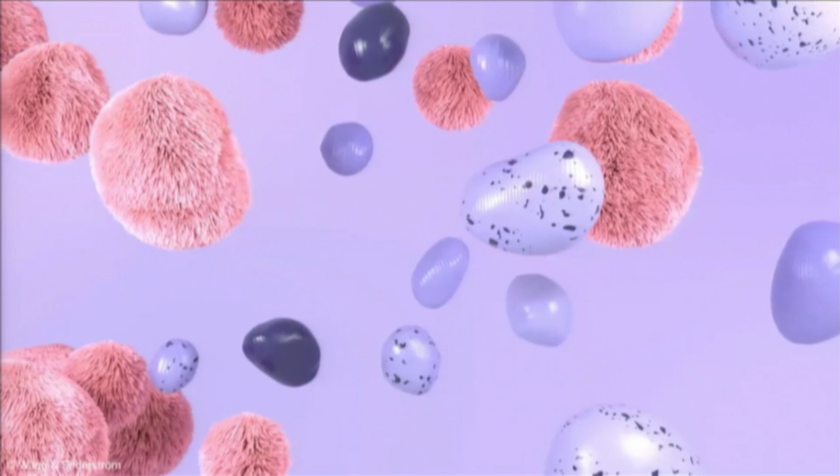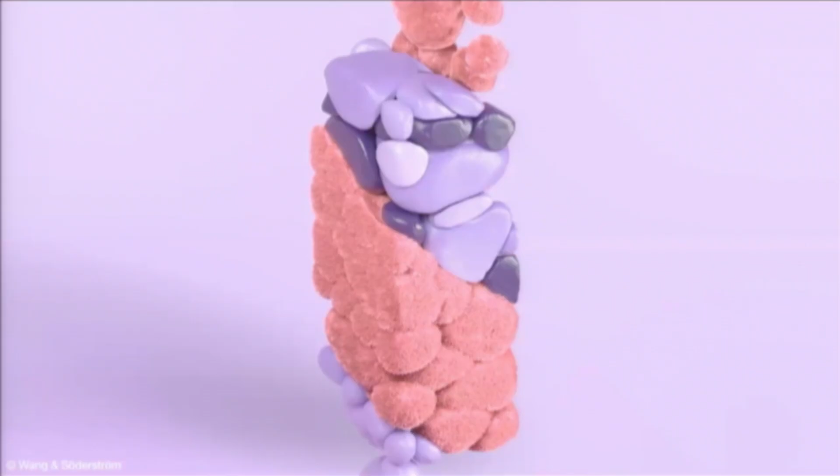I wanted to start by saying, we are never without materials. These seemingly mundane fragments and blobs of metal, plastic, ceramic, and glass are the stuff from which our whole civilization is constructed. Yet, perplexingly, while they do so much for us, we rarely pause to marvel at them. In fact, most of the time, we ignore materials. Their ubiquity is precisely the reason it's so easy to forget just how foundational a role they play in our experience of the world, of how we relate to and express love for one another, of the way we sculpt our bodies and identities, of how we fabricate the present and the future of everyday life.

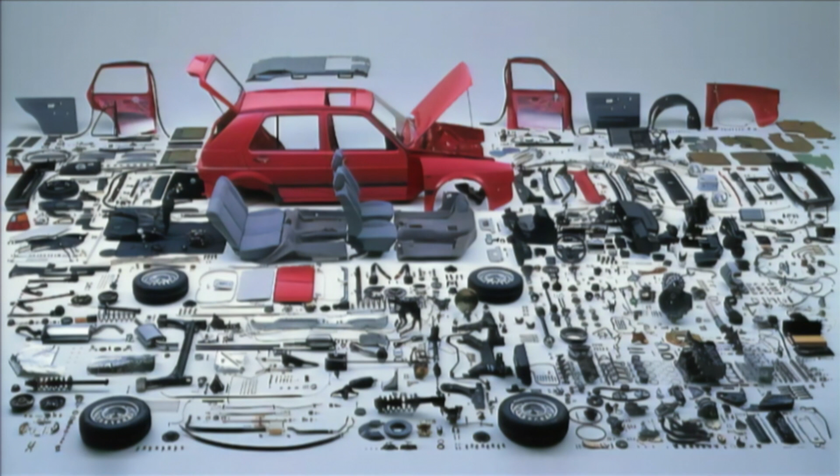Throughout history, societies have discovered and developed materials, made tools and artifacts from them, and in so doing, constructed themselves in the process. In many ways, we're living out the material dreams and needs of our ancestors, with much of our lifestyle that we're accustomed to today standing as a product of past inventions.

In order to do this, we need to readdress our relationship with materials. So this raises the question, what will the next 50 years look like? What will we dream up? And most importantly, who gets to take part in this process?

And this quote really puts it perfectly for me. We are often told we are materialistic. It seems to me that we are not materialistic enough. We have a disrespect for materials. We use it quickly and carelessly. If we're genuinely materialistic people, we would understand where materials come from and where they end up. And this is a quote by a Guardian journalist called George Monbiot.

And I wholeheartedly agree with him. We still have so much to learn from the planet. Exploring, experimenting, and working with the Earth's materials has led to so many groundbreaking discoveries, from the everyday to the unexpected and awe-inspiring. To date, human civilization has never existed without materials. They are the glue of our very existence, as ultimately everything is made from something.

But we've abused our time on Earth, stretching its resources to the ultimate brink in a bid to feed our all-consuming culture, an ever-growing need to own and to experience. All forms of life are equally precious, and so are their needs. The universe, contrary to common belief, was not created for humans alone. But human behavior actually tells a different story.

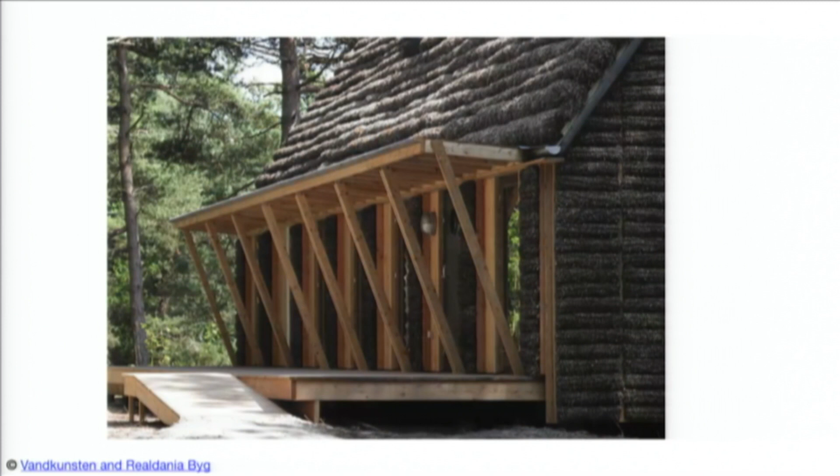And it can also be made into something perhaps more insulatory and protective. This is something that a lot of traditional Danish houses have actually been applying onto the roofs, as a form of thatching. And it's really insulatory, very protective, and this is a more modern interpretation of it. It could also be considered as IKEA's future meatball, something that Space 10 explored through a research project they did a couple of years ago.

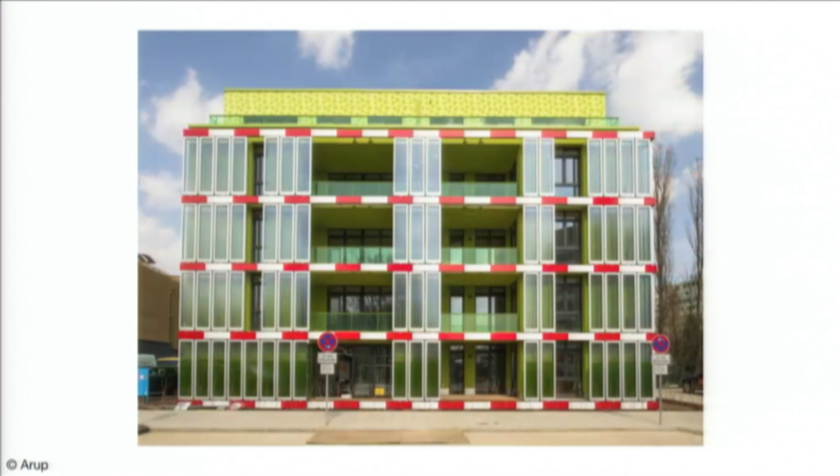It can also be something that could potentially be used as a fuel. So this is, I guess, an experiment that architectural engineers Arup have created by powering an entire building for 2 weeks using purely just algae. It can also be applied as a printing ink for fashion and clothing, as well as for paper. And it could potentially be something that could power your home as a technological device.

So this shows you the expanse of how a single material can have so much versatility if used to its full potential, much like a chef. And if we basically think about changing the narrative, which then informs behavior change, which then ultimately changes the system. And materials can help to expose the cracks of our ailing systems. They have the power to solidify new norms because they can make more preferable futures tangible.

And collectively, designers, artists, makers, scientists, engineers, architects, etc., are working to address these challenges by each placing a material in the foreground of their response. Most crucially, we're encouraged to recognize that the meaning of matter is fluid. Just as our quest to find and solve new problems is ever changing, so too are the values and roles we ascribe to materials.

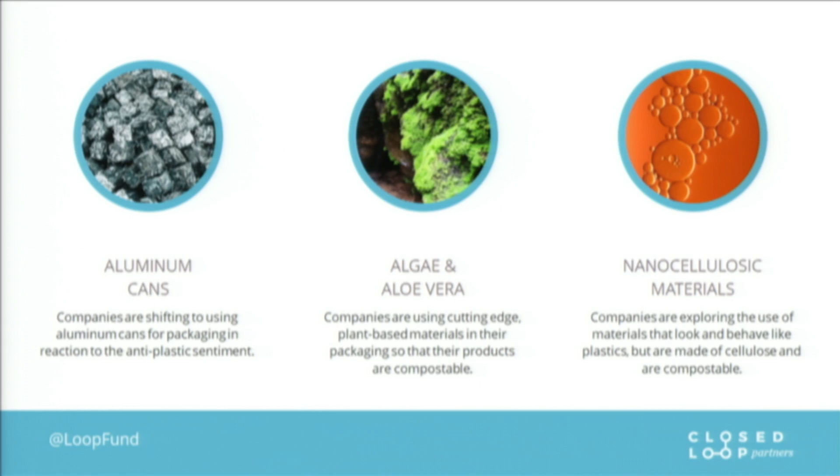And so some companies are looking at aluminum cans. Aluminum cans are infinitely recyclable, so that's a huge advantage. There always typically is some portion of that can that will use raw virgin aluminum, which is a challenging industry. We're seeing a lot of applications of algae and aloe vera in the startups that we're reviewing. And we're also hearing a lot more about nanocellulosic materials that can mimic the properties of plastic, but then don't have the unwanted side effects or consequences of the method of degradation after the end of use.

So innovative materials are part of the puzzle, but in the absence of collection and recycling, all of these materials will still have a linear life cycle. And so that's where we are continually working with the companies in our portfolio and the entrepreneurs we see to have them look downstream as well as upstream. But our current recycling system is not meeting all of our needs in terms of the volume of materials, the level of contamination, and how it's actually getting through our waste systems. And so that's where we're also looking for innovative new solutions, new technologies that can handle mixed plastic waste.

So only 9% of the world's plastic is recycled. And at the same time that I think everyone is recognizing, from industry, oil and gas, plastics manufacturers, to everybody in this room, that the way that we use and dispose of plastic is a huge problem. Despite that awareness, global plastics demand and production is forecasted to triple by 2050. So we're looking at doubling down on more of the same at the same time that we're scrambling to replace this in some way.

And so there's a tremendous misalignment between the demand for post-consumer recycled plastic and the supply that our system delivers. And so we're looking at technologies that can tap the plastics that we already have of all types, hard to recycle mixed plastics, and channel them to meet this continuing demand rather than continuing our current system of extraction of raw resources that end up in our oceans.

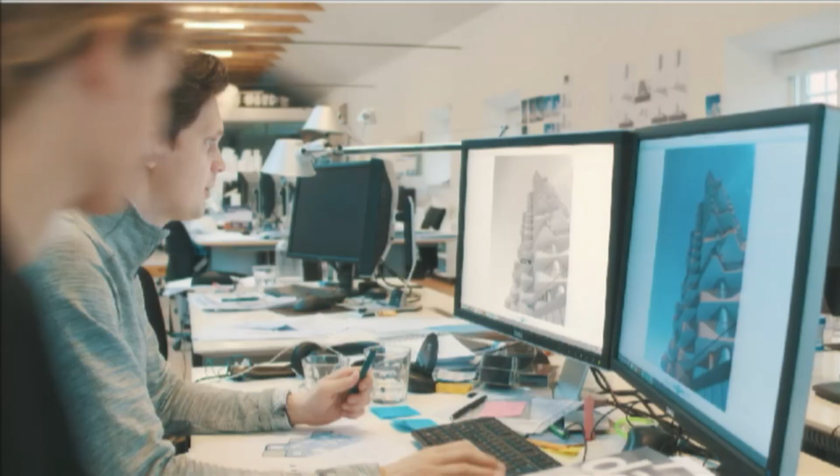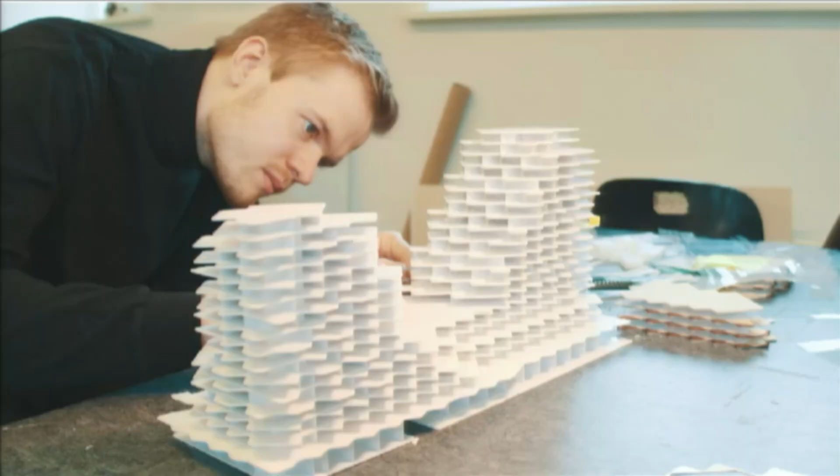Just a little bit about who we are. This is our office. It's an old cannon boat shed in Copenhagen. What maybe differentiates us a little bit from other architectural practices is that we have quite a big focus on research as a core part of our business. This is a movie from our office, and the reason why I'm showing this is that it shows some of the values that we have in our office, which is really openness, a non-hierarchical way of sitting together. I believe the idea is always king. It doesn't matter if it's the partner or the intern who comes with the idea. The idea is what drives us.

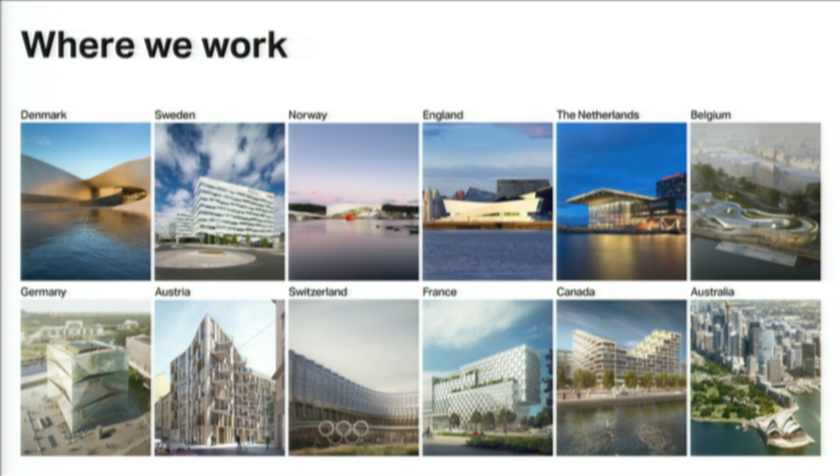So we work more or less all around, mainly in Northern Europe, some projects in Canada, quite a few projects in Australia as well. We don't do one particular type of building. We're not residential architects or hospital architects, but we do a wide variety of building typologies.

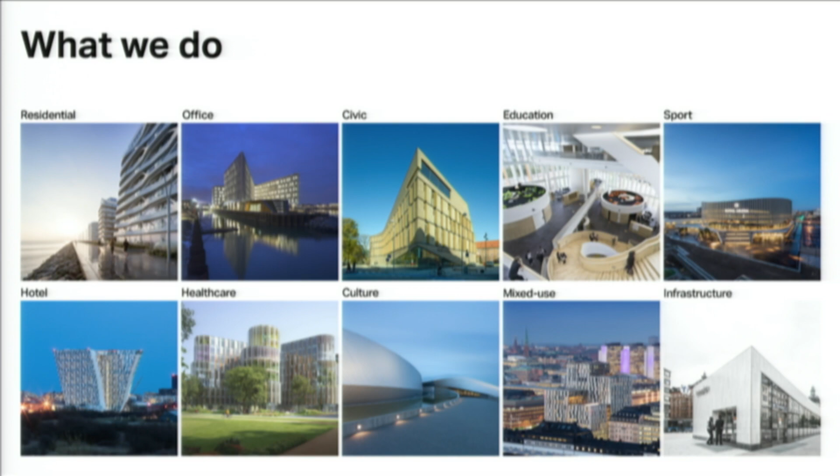And what we like to say is that what binds these projects together is our approach, our methodology, and that is really trying to maintain a closed feedback loop of research and practice. So my role in the company is really to try to nurture some of the research projects that we have in the office and try to bring some of that knowledge into the practice that we have. One of the things we do is we write books. This is a book we did some 7 years ago together with Bill McDonough and Michael Braungart, the founders of Cradle to Cradle.

We were super inspired by the Cradle to Cradle thinking, and we really wanted to understand what that meant for architects and designers. How can we work with this? So we did a book where we tried, almost pedagogically, to say: what are the principles we can work from? How can we do it? What technologies are available? And we made that an open source publication for the building sector in Denmark.

One of the questions posed within Cradle to Cradle and the circular economy is how can we be smarter about waste? So we asked ourselves: how can we create tomorrow's buildings with the waste of today?

This is an image from a research project we did. It's the team scavenging through Danish agricultural waste. This is a factory producing a kind of starch for Coca-Cola Zero, to give it the same viscosity as normal Coca-Cola. They do this kind of fiber processing for a lot of companies, and they have almost mountains of fiber waste. It's a good day at work when you can dress up a bit like a scientist and walk around in waste.

Talking about circularity and financing, this was an interesting project because it was owned by a foundation. Their business model was to attract people in the shoulder seasons to this hotel based on a narrative of sustainable technology, and then reinvest part of the earnings from the hotel into new technology—constantly making a demonstrator of what sustainability could be. We helped them do that project, and this is just some of the solutions we did. We did around 70 green solutions, as we called them at the time, hence the name Green Solution House.

I'll show some of them. This project is now about 8 or 9 years old. At that time, working with transparent PV solar cells was quite new, so we wanted to make an ornament out of producing energy, turning it into an architectural experience. We really wanted to look at what existing materials we could upcycle.

We had to change the windows for this building because we had to live up to new energy standards for the glazing. So together with the manufacturer, we turned those old windows into glass fiber insulation, which we used to insulate the old pool, which was worn down, turning it into an energy storage—using solar heat to store in the old pool and use throughout the building.

This is on an island in Denmark where they do a lot of glass art—they're known for it. So we visited the local glass artist to see what kind of waste material they had. They had this beautiful glass waste, which was then run through a machine so the edges were smoothed, and we used it as pavement in the park.

We looked at the granite production that was also quite specific to this island, where the waste product of that is the kind of granite dust that we used as a settling layer for all the landscaping, instead of what you usually use, kind of oil-based things for that.

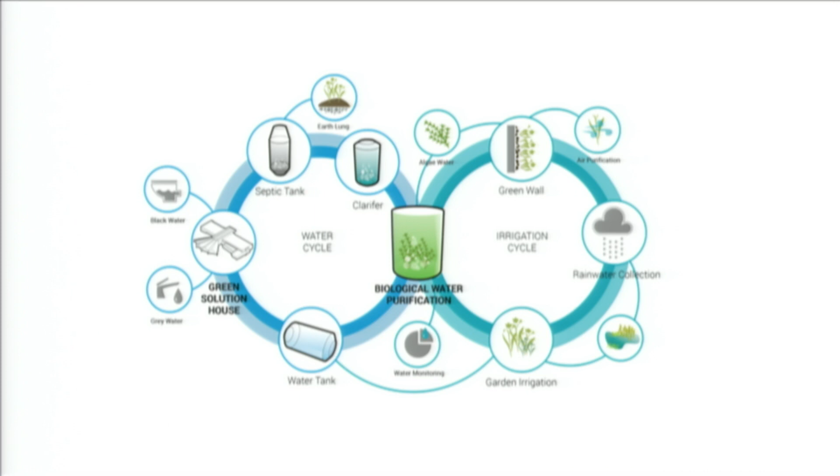We looked at water as a potential resource for the architecture as well, so doing a closed water system where we run the gray and black water of the building through these algae tubes that stand in the facade. Quite a funky architectural feature, I would say. They go up and down and have this green glow to them, and they're cleaning the water that then feeds back into this green wall at the conference part of the hotel.

I think one of the key questions we are asking ourselves in the Danish building sector right now is how do we actually design for future circularity? It's great if we can reuse some of the materials we already have in play, but how do we begin to design something today that doesn't leave the same problems in terms of waste generation in the built environment for the next generations?

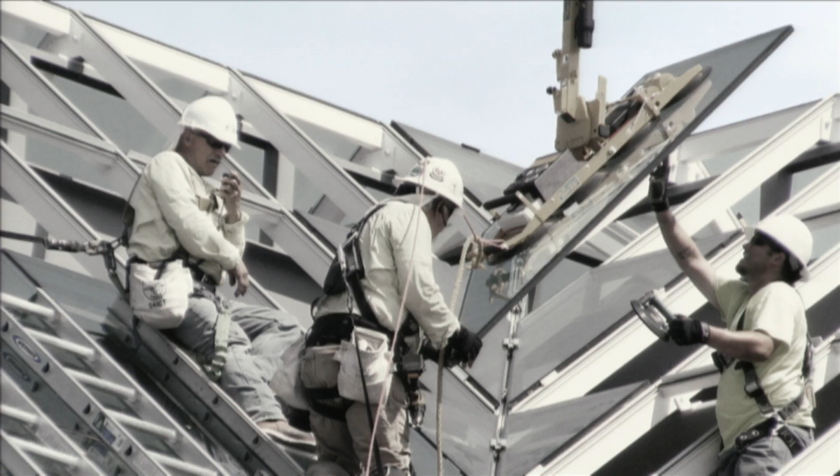89% - that's what we popularly say we recycle from Danish building waste, or building waste in Denmark, and that's true, but it basically looks like this. This is how we build in the industrialized building sector. The building sector in Denmark and Scandinavia is quite highly industrialized. There's even a guy talking on a walkie-talkie, and people know where all the components are going, and we have it all described in a digital model. So we feel we have it pretty much under control.

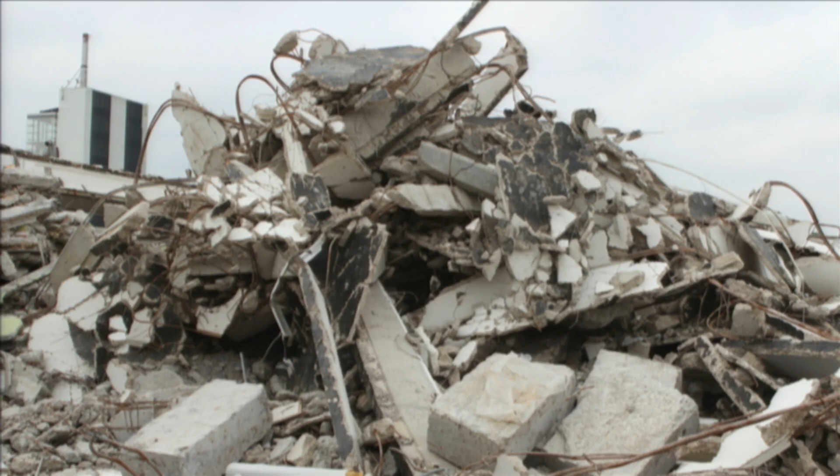And this is basically what we do when we have to take a building apart again. It's a big grab, and then we more or less crush everything into gravel, and then we sell it at a low price. So we might recycle 89% of materials, but that has to do with mass, with weight, not with value. We actually only recycle 2% of the value. So there's a huge value loss in the way we deal with existing buildings and material from existing buildings. We like to say we need to talk about value, not volume.

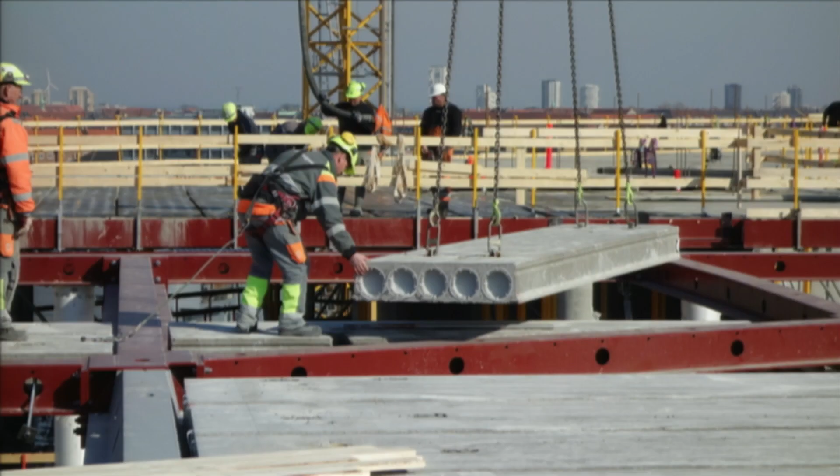And I think that's a key part of the discussion within the circular economy. So we tried to do a book on this, called Building a Circular Future, where we try to outline the principles of how we should begin to design for a future that looks different today. We'd like to show this image, which is a typical image from a construction site in Denmark, and it would be great if this could be a demolition site as well - if this image could be both. That's how we like to perceive it.

This is the diagram we use as one of our methodologies to understand this. This diagram was originally done by Stewart Brand - before he became some kind of tech guru, he was actually thinking about buildings. What it says, which I think is quite profound and simple in a way, is that a building is not a static thing. It consists of a series of lifetimes, a series of metabolisms that need to be treated differently. So if you look at the lighter parts of a building, you have to understand they are likely to have a shorter life than, for example, the foundation.

We're trying to discuss this in a research project that we are now turning into tendering material, going to be tendered out for the Danish industry to react to. It's basically a very simple housing project - public housing, done at a restricted economy. The innovation here, or the claim for circularity in this project, is that we want to build it so that 90% of everything that goes in there can be taken out and reused without any loss of value. It's quite a push, and we're still trying to figure out how we will evaluate and document it. But that was our moonshot to begin with.

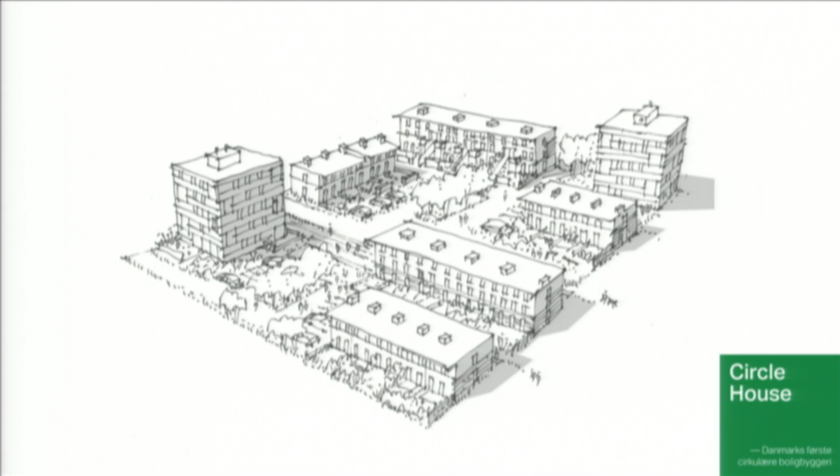What we did is basically all the development needed to be done together with a broad range of players from the industry - everyone from other architects. We didn't want it to be our design.

We wanted to make a system for everyone, from manufacturers to engineers to environmentalists. One thing we looked at was how to make a concrete superstructure, the load-bearing part of a house, so it can be taken apart again. You might ask why we didn't do it in wood - it would have been a lot easier. But the Danish concrete industry is so successful that they haven't done any innovation in 50 years, so we wanted to get them on board and say, hey, you also need to look at this and work with this.

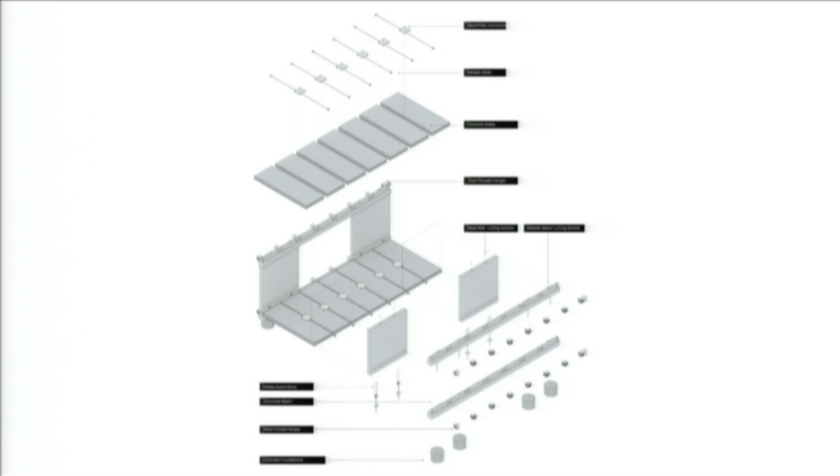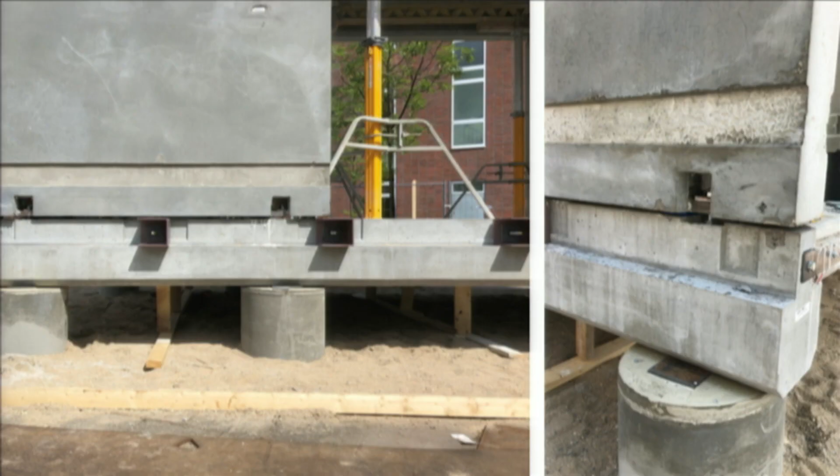This superstructure system is based on mechanical jointing - this is the demonstrator. All the prefabbed elements can be put together, then we cast it out with a chalk-based mortar, and it can be high-pressure hosed free again. So in 50 years, if you have to take this apart and move the elements, it's fairly easy to do.

We're also just showing what's possible, experimenting with different facade materials. This is a post-consumer plastic shingle, just to indicate that you can do that. To the left is a ceramic tile designed so it's hung on the facade without mortar, meaning you can screw it off, and if it gets worn, you can turn it around and use it again. The third one to the right is cork, made of waste fractions from cork production, pressed into a facade material.

I want to leave you with one last project, a big commercial project where we're putting some of these more research-based things into play. It's a project that begs the question: how can we transform the existing building stock? How can we do something that's not just hammering everything down into gravel?

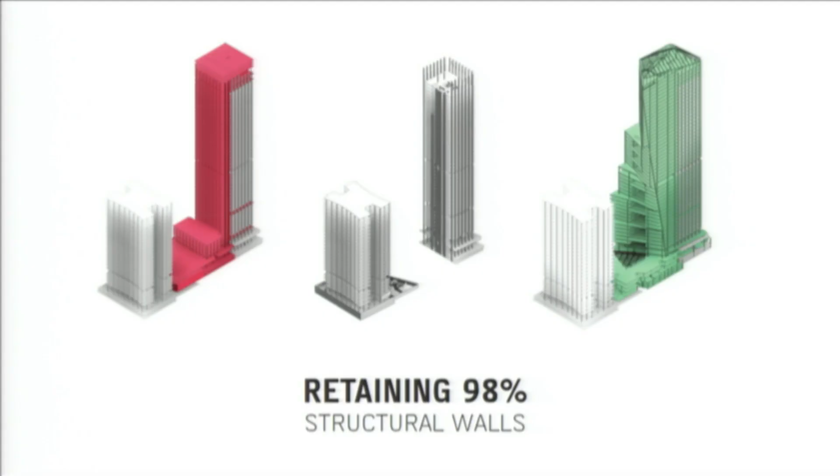What's super interesting is that there's an existing high-rise on the site that we're turning into this. What's marked in red is what we take away, and what's marked in green is what we add. We're actually retaining 98% of the structural walls of this building.

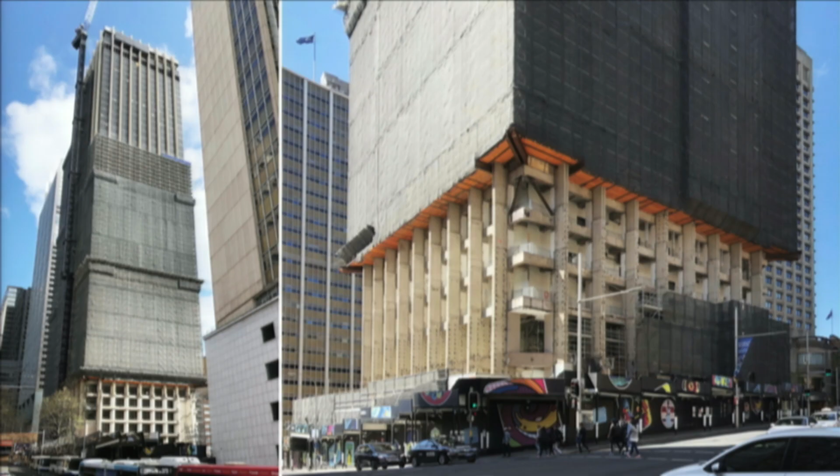This is how it looks on site now - you can see they're stripping everything down and putting in new slabs and a new facade.

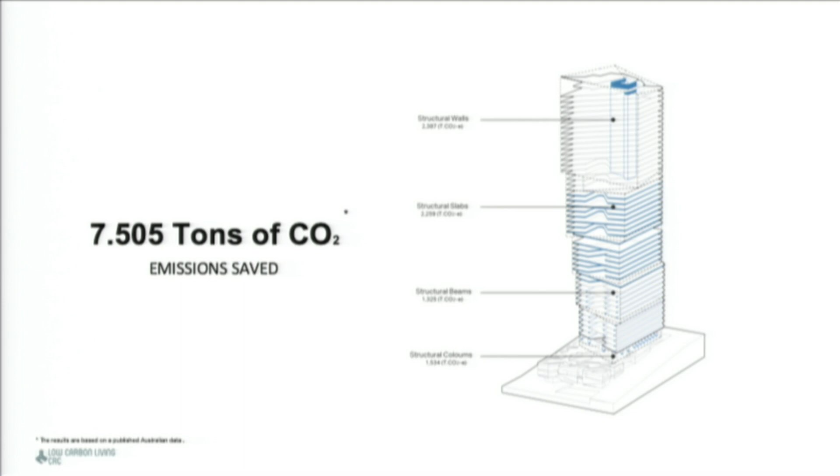In terms of CO2, this actually saves 7,505 tons of CO2. What does that mean? It's the equivalent of 2,500 one-way flights from Sydney to Copenhagen, so we can feel slightly less bad about flying there.

That's always good. This is basically the most interesting part for me, and definitely for the client - and this is the client's number, not me dabbling with an Excel sheet - they actually save 130 million Aussie dollars doing this, as opposed to knocking it down and building up again. I think that's pretty interesting to a client as well.

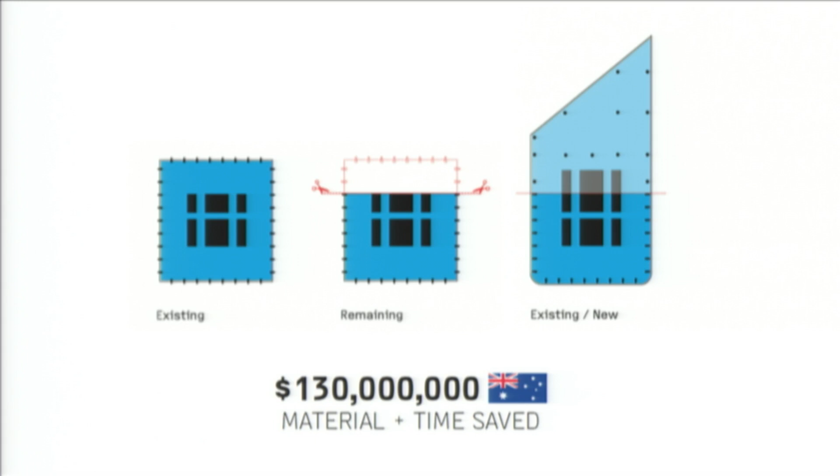But what we really wanted to do is we wanted to make a high-rise where you have this kind of social cross-breeding, let's say, of views across the different floors. I mean, you know better than me that in most high-rises, you come off the elevator and you don't really know where you are, and you can't see people on other floors and so on. And we really wanted to maybe try to be a little bit Scandinavian about it and introduce a more social effect into a high-rise.

And the client was quite happy about that, but it was a big risk for them because as we were developing this project, they were negotiating with the potential tenants of this building. And they said, okay, that's interesting, but what if they don't want it? What if we have one organization who says they want four floors of atrium, and they don't want it anymore after a couple of years, or they shrink, or they grow in size, or whatever?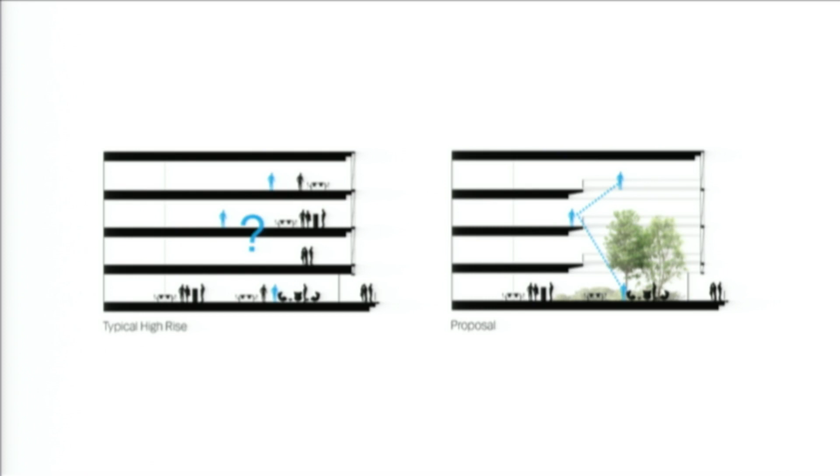So we basically proposed, what if we can make some kind of slab using design for disassembly that can actually move around, so you can mitigate that risk. And to some of your points, Kate, mitigating risk is a big thing in the built environment. So we didn't say circular economy, we said mitigating risk. And that was a more intriguing thing.

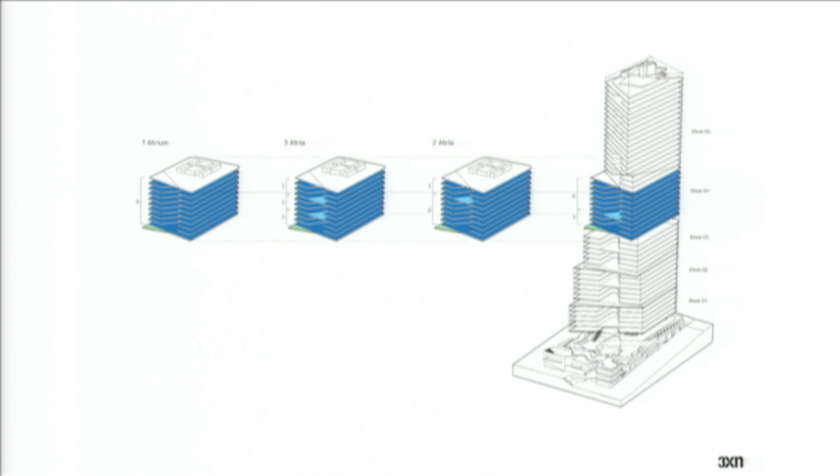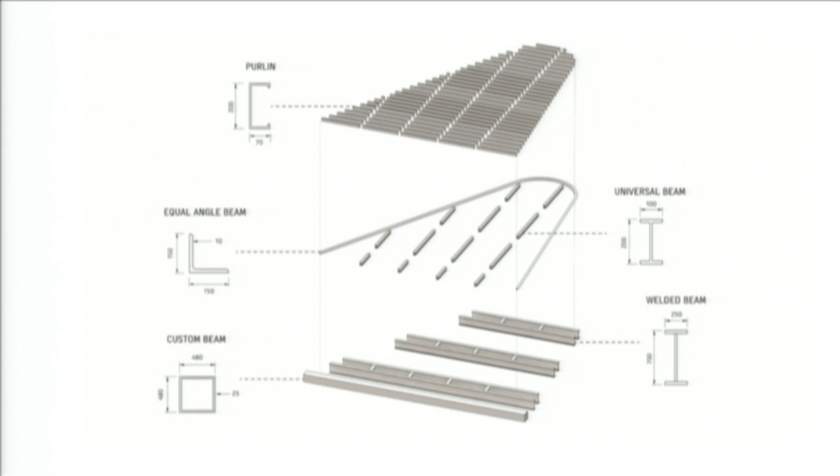And so this is basically how it looks. We call it a decon floor. It's basically all based on mechanical joints. It can be taken apart; it's not welded or anything like that. It's basically sized so it can go in the freight elevator, so you don't have to take off the facade in order to move this slab around.

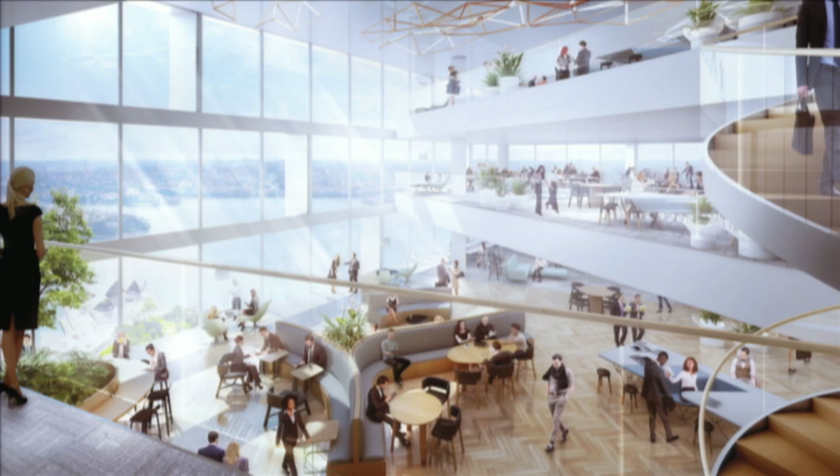And what we of course get from an architectural and humanistic point is you get these atriums where people can see each other and interact, and we believe have a more healthy work environment of not just sitting in slabs disassociated from each other. Yeah. So that was me. Thanks a lot.

I can talk loud. Oh, there we go. Okay. So I think we're well into the break. We need to, yeah. I've got 10. All right. Great. That means I got to ask more than one question.

So we have a lot of designers, educators, and architects in the room, and both of you, in your bios, in your work, in your presentation, are bringing in a lot of rationale from being in government, working with government, convening folks outside of the raw discipline of design. What advice would you give to a designer, a student, educators in the room, for how to think about the future of what this profession requires to bring about circularity? That's a really easy one. Yeah. No problem.

I guess I would say, following up on what you said about working with government, I worked in government for more than a decade, and working at the Landmarks Commission, of course, worked with architects every day, and have a sense of how that works with the government, and the permissions that are needed, et cetera. And I think what's so elegant about what Lasse just presented is that you can focus on efficiencies if you need to. Risk mitigation and efficiencies are the language of so many of the audiences that I worked with in government, and now in the private sector. That's what we're talking about.